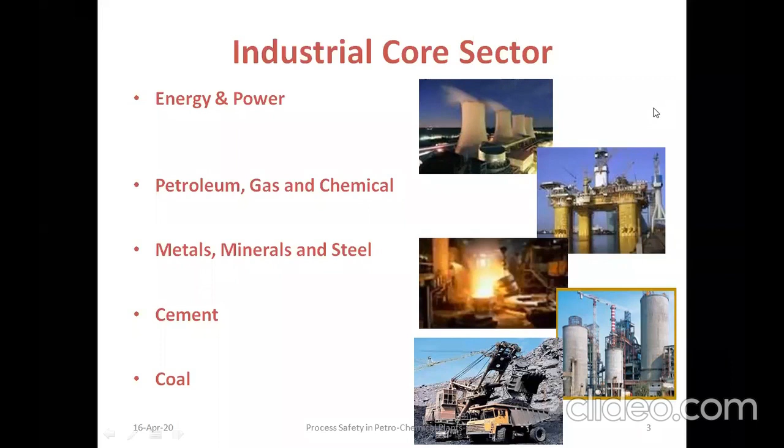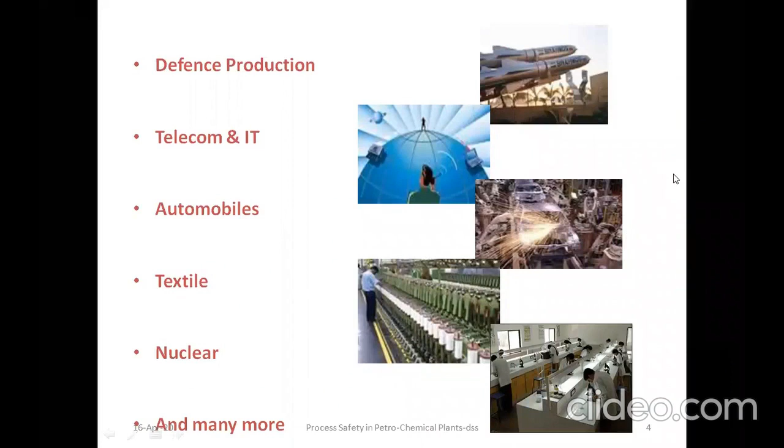Before going to process safety, we'll understand what sectors are available in the industry. We call it the core sector: energy and power, then petroleum, gas and chemical, then metal, minerals and steel, then cement and coal. Then we'll go for defense production, telecom and IT, automobiles, textile, nuclear and other industries.

Now, when we go for the industrial domain, we have storage of raw material, solid or liquid or gas, process plant or machinery, utilities, or power, steam - who are all generating power and steam - and isolated nitrogen. This is now coming up separately in industries. Previously, all these utilities were generated by the same plant and utilized there. Now the worldwide strategy is generating separately and supplying to others.

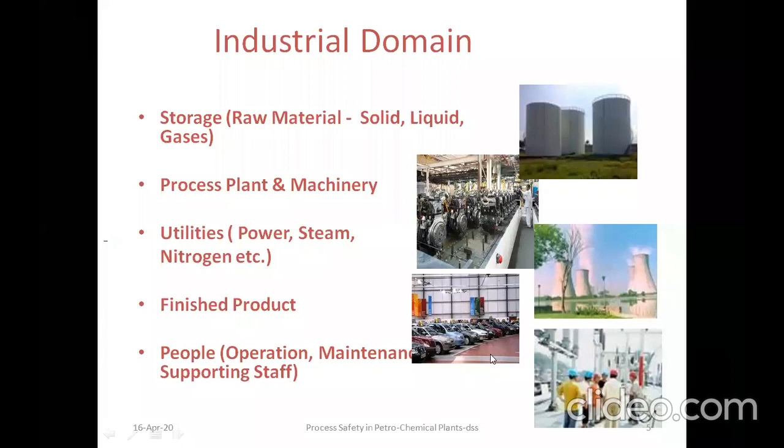They are called downstream industry. This is the technology they are doing now. Then finished products, then people involved in operation, maintenance, all these things - we call them supporting staff.

Now we call it industrial accident. When you go for an accident, it is a very tough, unwanted thing that everybody wants to avoid. But it is one which causes a major failure or accident that gives a loss to the industry as well as to human life.

So we call it industrial accident - caused by chemical, mechanical, civil, electrical and other process failures due to negligence. Normally negligence is the major cause, and it comes under industrial plant spillover to areas outside the plant, causing an environmental problem. That is what we call industrial accidents.

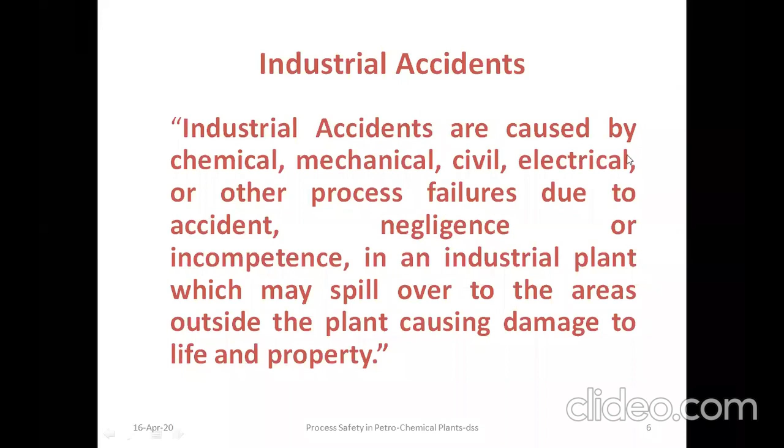Normally we have some idea. We say industrial accidents mainly originate from manufacturing, formulation and installation. This starts from manufacturing, then the installation process, then including commissioning and maintenance process, and disposal. Then it can also happen during material handling, and during storage.

That is the facilities they have - some manufacturing as well as storage, like oil tankers, all these things. Then isolated storage, then warehouses, then godowns. Then while transporting the materials, this can happen.

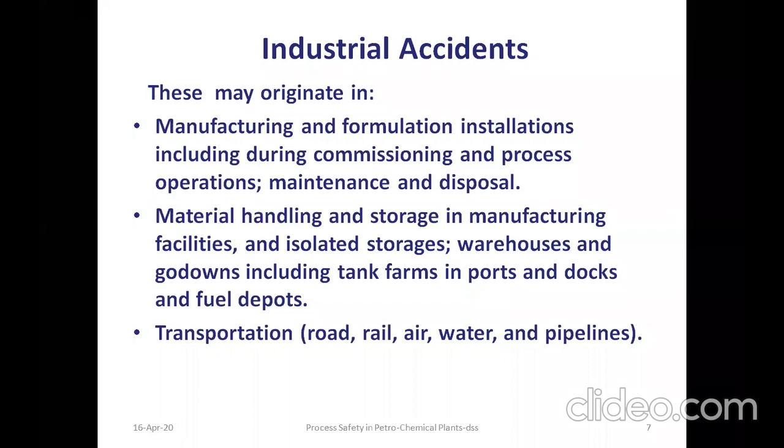This is the accident. Now, what are the major threats for the petrochemical industry? They face accidents - fire, explosion, toxic release, poisoning, and combination of all the above. These are the things we call major threats in our petrochemical industry, which should be avoided. For that, we are going to discuss this.

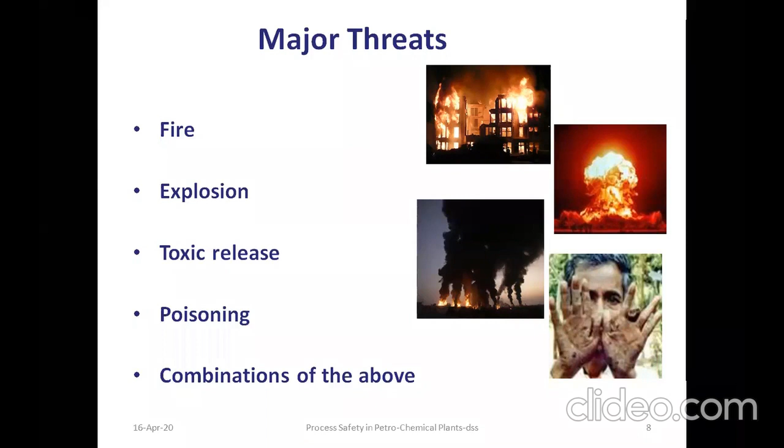Now, what are the probable causes for these accidents? Normally, when you go in detail, what are the problems? The major one is process variables - that's a famous term, particularly in petrochemical industry. That is normally pressure, temperature, level, flow.

When you talk about these process variables, whatever sensors are used are all electronic nowadays - there's no electromechanical, it's purely processor-based. So we can talk about deviation - we call it process deviation because of these PVs, that is process variables.

Then parameters with regard to state of substance - liquid, gas, proximity of substances. Then runaway reactions because of catalyst or chemical reactions. Then hardware failures because of electronic failures resulting in large scale spills of toxic substances.

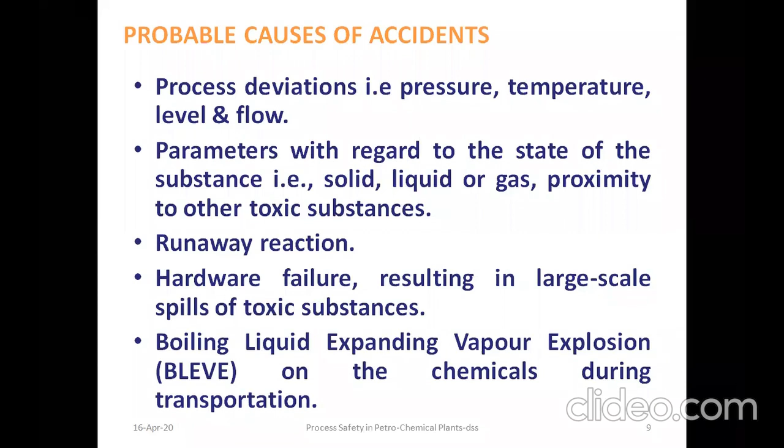Then cutting and welding - during welding or cutting maintenance work, there is also a problem. Then open flame is also a problem. Then carelessness is also there. Then poor housekeeping - yesterday also we had a meeting on fires. That is very, very important.

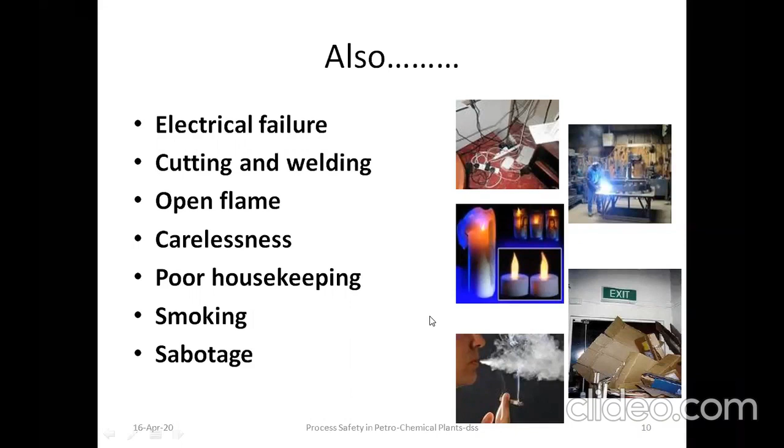Today also we are passing through a critical situation for corona. We have to understand that housekeeping is very, very important. Then smoking, then sabotage - these are also included in the problem. Then compounding effects - what are the effects of the accident normally? Please remember, these are things we are discussing more on the petrochemical industry, but this can apply to normal industry too.

That's the meteorology conditions of the area - wind speed and direction, rate of precipitation, toxicity quantity, the quantity of chemical released, and the population it reaches. Then the probability of formation of lethal mixtures, and industrial activities - nearby industries will also be affected. One accident in an industry can affect other nearby industries, which is the compounding effect of accidents.

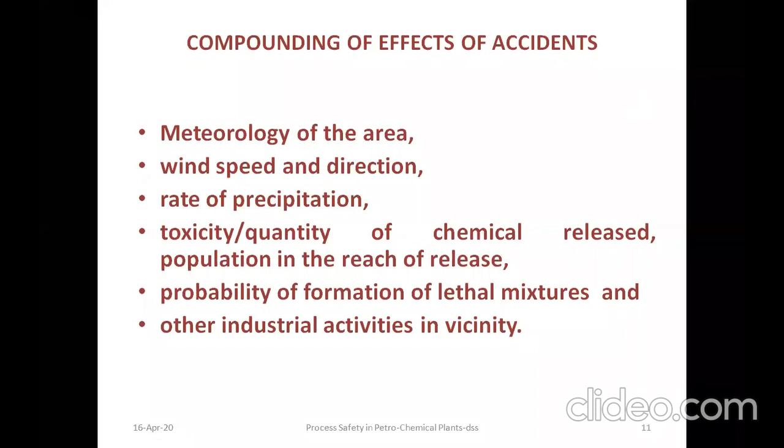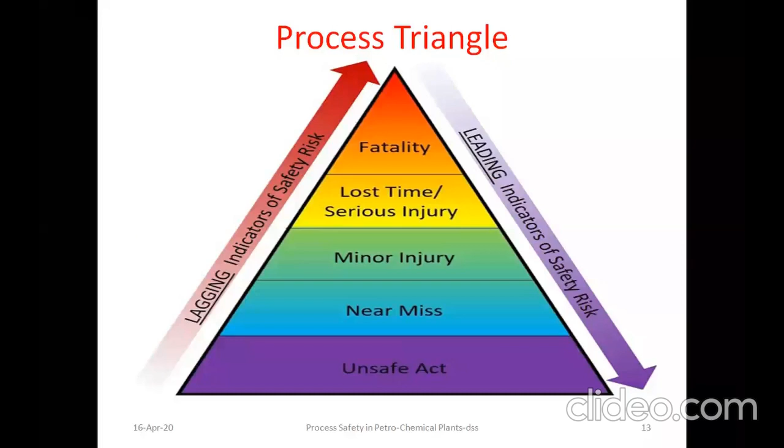Then what are the impacts? Normally it starts with an unsafe act, then goes to a near miss, then minor injury, then lost time, then serious injury, then fatality - which is what we don't want, because it leads to heavy damage. These are the things we call the process triangle. Everybody wants to avoid these things. This is the impact, and this block diagram will explain it.

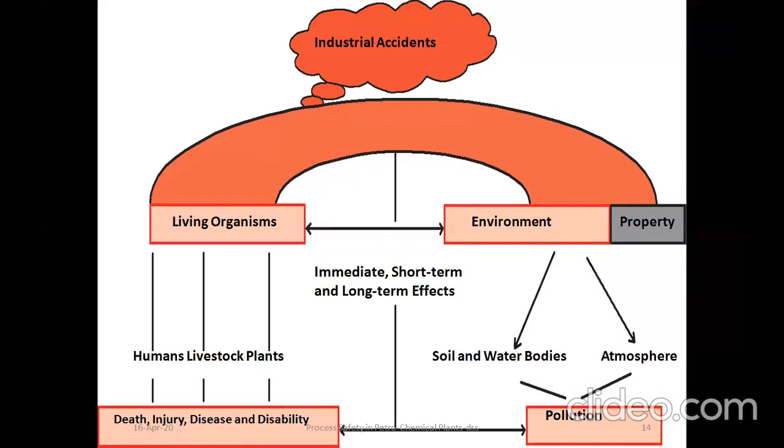We have got three things. Living organisms will be affected because of this - humans, livestock, plants are there, and that is also a problem, leading to death or injury. Environment is also a problem, then property loss - these are the things. When it comes to environment, it will spoil the soil, air, water, all these things, and the atmosphere, that is air.

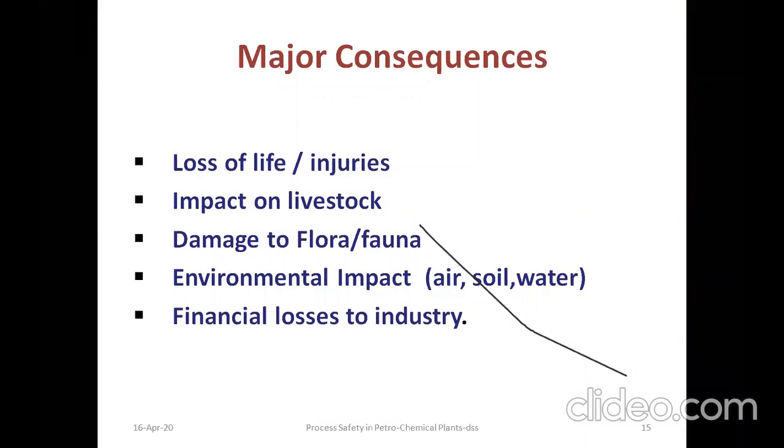So then it goes to the major things. Loss of life is very, very dangerous - that should not happen. Then impact on livestock, damage to flora, then environmental impact - that is something we don't want. Financial losses to the industry as well as to individuals. These are the major consequences of accidents.

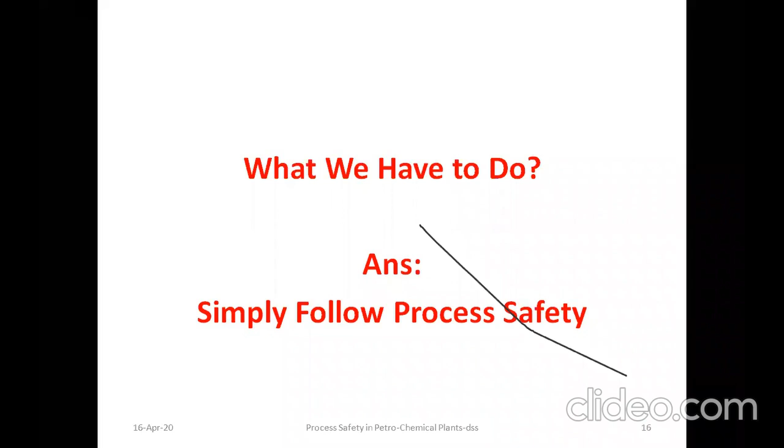Then what do we have to do for this? The answer is very simple - you have to follow process safety. In petrochemical industry, heavy industries throughout the world nowadays simply follow process safety. That is the reason we are not facing major accidents nowadays. For all industries coming up, for youngsters going to work in industry, they should follow process safety. So that's the answer - what to do means we have to follow process safety. What is to be there? Then we should understand what is the process.

Normally everybody asks, sir you are telling about process safety, process safety, then what is the process? We will understand what is the process. Process is one very simple thing - you have to make it a procedure. Whatever job you are doing, you are aiming to achieve something, and for achieving that, you make some route, some steps, or procedure you follow. That is the process, simply.

Process is a simple set of steps or decisions involved in the way something is completed. It's a set of recurrent and periodic activities - you do the activity in sequence so that you produce a result, which is the aim of the work. So we get the result by following simple activities in a sequence of steps, a sequence of interdependent links, using one or more resources. So we simply call it a process, a series of actions.

For example, take coming into this webinar class - what process have you done? You open the laptop, switch it on, then log in. All these steps you have done - this is a process to achieve that, to present yourself in the meeting. This is like a process. This is a simple way of understanding process, right?

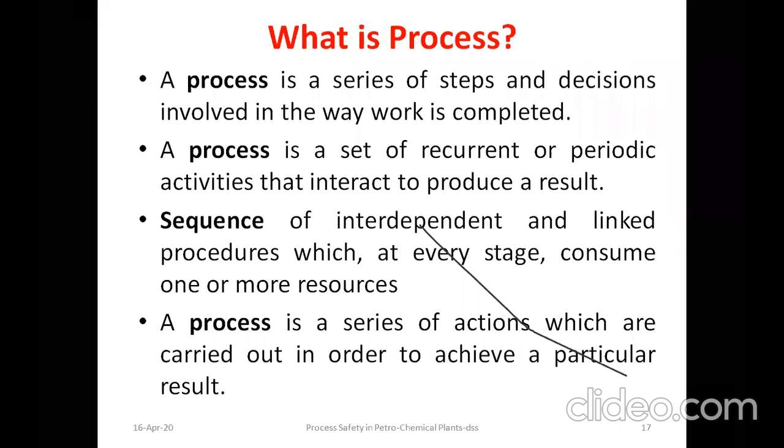Then what is safety? It's very simple - you have to protect yourself, or we can call it protected from harm or other non-desirable outcomes, because something will outcome that we don't actually want, and safeguarding from that is safety. It can also refer to the control of recognized hazards in order to achieve an acceptable level of risk. We can have risk, but it should be at an acceptable level - we cannot go beyond this.

That is called a safety. The concept includes all measures and practices you have to follow, to preserve the life, health, and bodily integrity of the individual. This is safety.

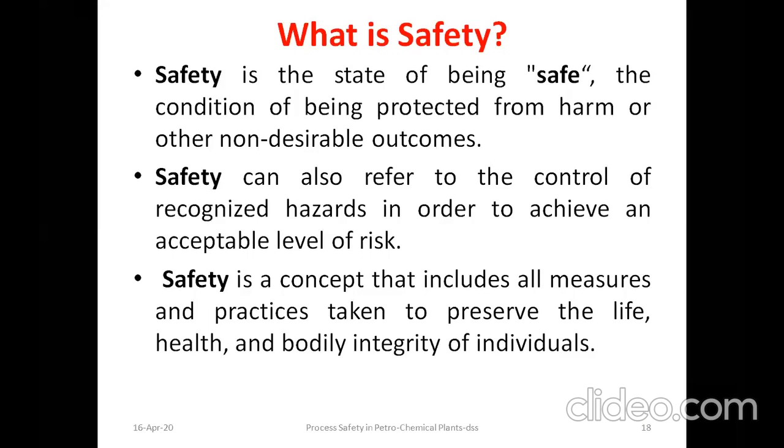So we have seen the process, and we have seen safety. Now we'll see what process safety is, combining both. We have the process in petrochemical, and we have individual safety. Now let's see what process safety is.

Generally, we call it prevention of unintentional release. When we go for a plant, we will not do it intentionally, nobody will do that. But mistakes happen because of some parameter change or procedure change. That is called unintentional release of chemicals, energy, or other things, which is called process safety.

We have to make it safety. For this, we have to set a discipline and framework for managing the integrity of the operating system or process. We have to make it a procedure, which we call the process safety procedure, present in many industries.

No doubt, all industries are following this. That is the way we train people. Normally in heavy industry, they give very disciplined training for process safety to whoever is involved in the process, including maintenance, operation, as well as warehouse people. Normally this is what they do, combining process and safety, which we call process safety.

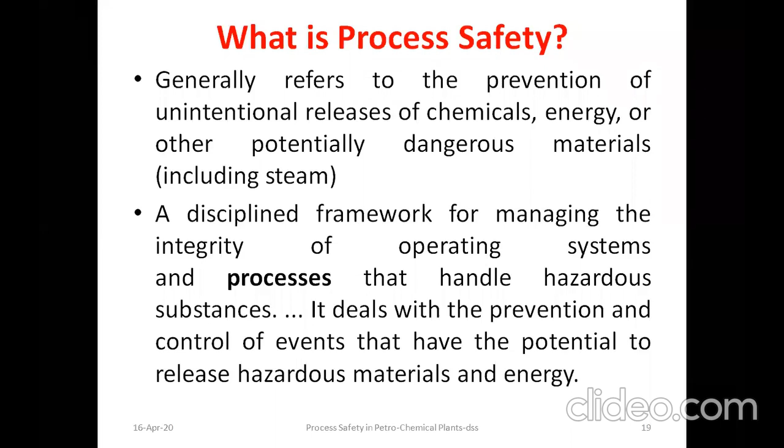Continuing, it is a discipline - you should be disciplined. When following a step, it should be done with good discipline. You have to follow good design principles as well as operating practices, which is in the manual. But when you do it every day, it becomes automatic practice - there is no need to refer to a manual during an emergency. That is what we train people for, so they go through the process safety properly.

Then it deals with the prevention and control of incidents, and potential release of hazardous material or energy, because once you lose control of process safety, that results in loss of energy too. Apart from environmental problems, energy loss is also there. Such an incident can also cause toxic effects, fire, or explosion, which would ultimately result in serious injury, property loss, production loss, environmental damage, as well as legal issues. These are the things process safety has to consider.

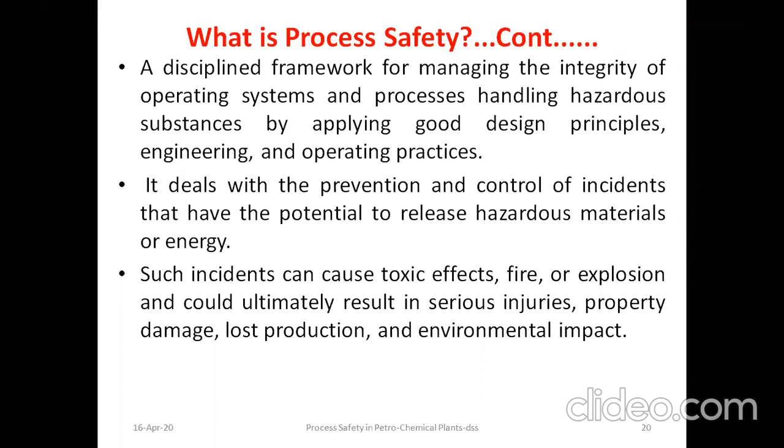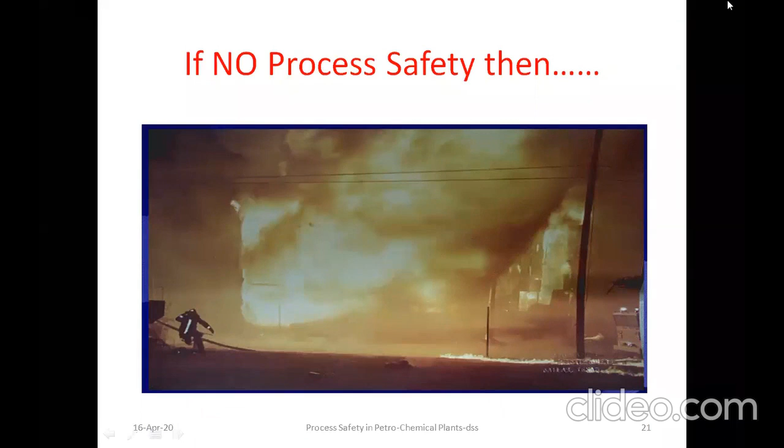These are very important things, right? If you don't follow process safety, very simply, what will happen? This is one sample. We will see that if you are not able to do process safety properly, not able to control or follow this, these things will happen, right? This is one result.

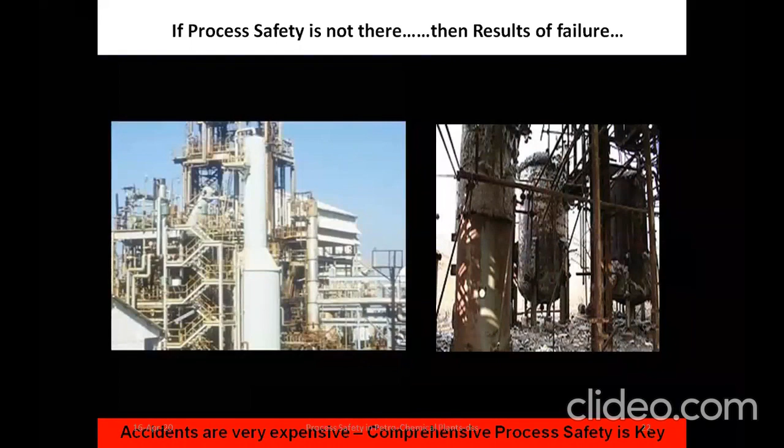This is from our petrochemical industry. Please remember, serious accidents have happened in the past. In recent days you cannot even count them, but this is one of the older ones. We'll have an idea of what happens in petrochemicals if you are not able to follow process safety, because the loss will be very heavy - not like a simple accident, right? This is one sample of these things.

Then we move to plant safety. Now we are coming to the plant. Primarily, what is its function? It's a primary management activity. Normally everybody says the safety person working has to be involved and has to follow it, but the real thing is it's a primary function of management to make sure everything is done - to reduce, control, and eliminate hazards.

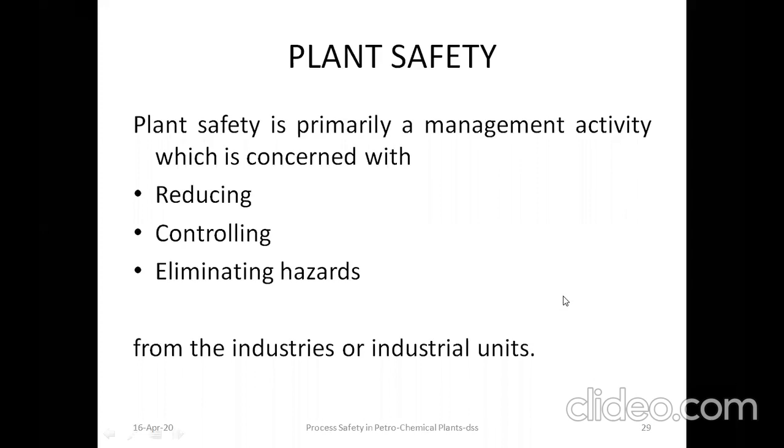These are the three things all industries have to follow. This is a management responsibility, so they cannot say no. Normally, plant safety is under the control of management only. We have to follow this - they should set a role model, and only then will all the workers or engineers follow.

Then what is the significance? The significance is, while following plant safety, an industrial incident causes loss to both employer and employee, not only employee. This employer loss is very, very dangerous.

Then medical aid. Once an accident happens, how much money is involved in medical aid? Very, very dangerous. Then training a newer person - okay, you can have a new person, yes you can have it, but how much cost? You are training the people, how much time it takes.

That is called a lost time accident. Normally in industry, if a person involved in an accident is not able to report before 48 hours, that goes as a lost time accident, because it shows it is a very dangerous accident. If the person is not able to return to duty before 48 hours, then it counts as a lost time accident, because the management is answerable for that.

Then investigation - what is the cost of investigation? They will form an inquiry committee, and all these things cause loss of money. That is the one.

Then cost of supervision and inspection - you have to involve this, that is also a cost. Then cost of government - the factory has to call the people, you have to spend money on this. Then public health services, all this money is involved. They cannot do it unless we serve some money, then only they will do that, because that is government money involved.

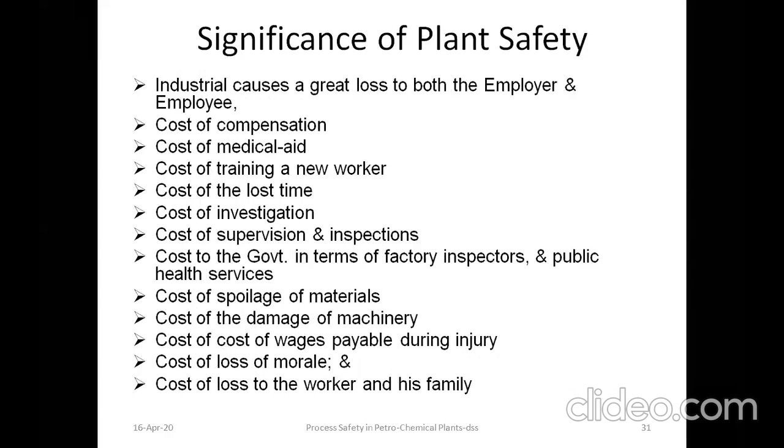Cost of materials, then damage to the machinery, as well as payable to the injured people. Then loss of morale, because morale is very, very important. Once an accident happens, the company employees' morale goes down, and getting it back is very, very difficult. Then there is cost loss to the worker as well as the family - that is very important. These are the things.

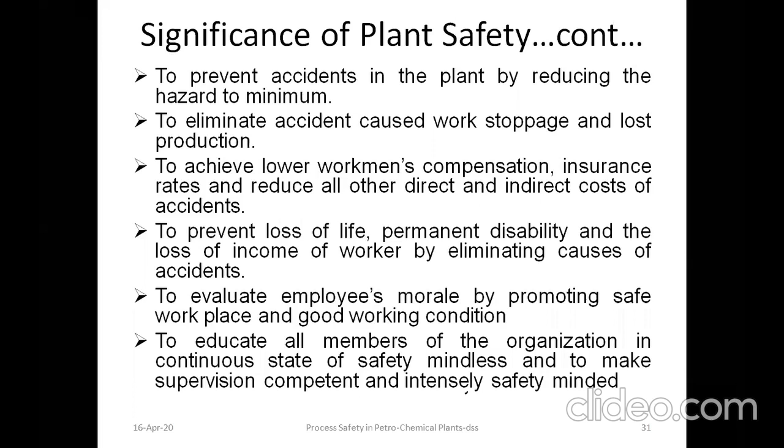Now, how to prevent this? We have to reduce accidents as well as hazards, and eliminate accidents, work stoppage, all these things. To achieve this, lower workman's compensation, insurance, all these things, to prevent loss of life, permanent injuries - all these things you have to do. To elevate employees' morale by promoting a safe workplace as well as good working conditions. Then we have to educate the employees, all employees from top to bottom.

Then what is the objective of process safety? To prevent accidents, reduce the plant hazard to minimum, to eliminate accidents so work stoppage or loss of production should not come. To achieve this, lower workman's compensation, you have to do this to prevent loss of life. All these things are there. Then morale is there. Then educating the members is there.

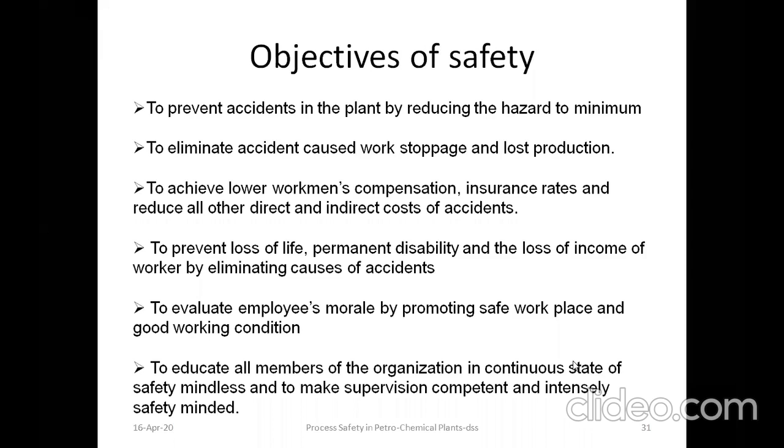Then what are the causes? Normally the major one is unsafe condition. In this, the job itself, the work schedules, the psychological condition, and the machinery and equipment condition. Then second is unsafe act, and third is miscellaneous causes.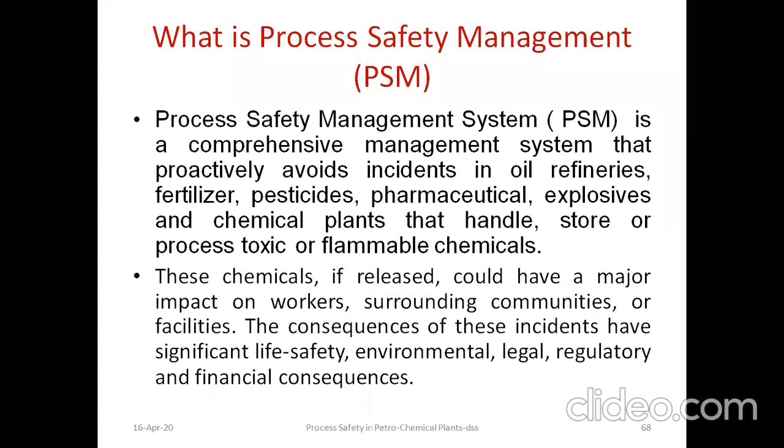For these things, we normally call it process safety management. Process safety can only be done if management is involved, so the system itself is called process safety management, PSM. It is a comprehensive management system that all industries follow normally because it impacts workers, surrounding communities, the consequences of incidents, life safety significance, environment, legal regulation, and financial consequences. That is the reason why PSM is very important.

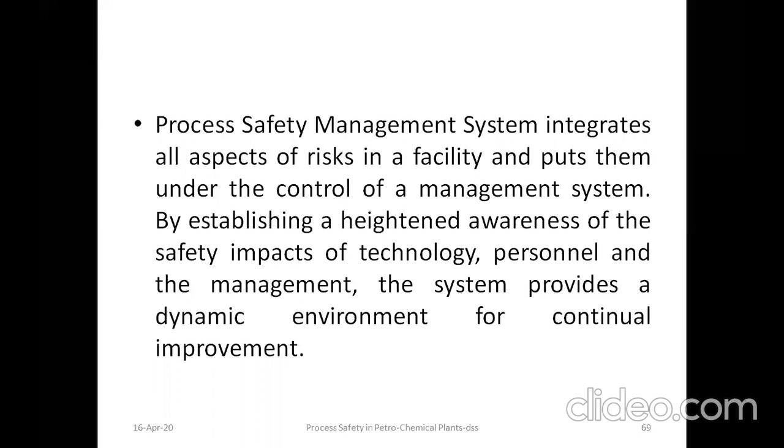The system is integrated with all aspects - all the risks, whatever facilities are available, whatever the inputs - everything will be taken into consideration. Then the management system will be followed, and awareness will be highlighted on all these things. Whatever technology has been developed has to be incorporated, then it will be trained to all the people so that it remains a dynamic environment. Continual improvement has to be done - that's there whenever you go for any system. Now it is compulsory that we do continual improvement, and we have to show that in PSM also it is there.

PSM consists of 14 elements. When you go for process safety, the management has to form a PSM committee that consists of 14 elements. What are the elements? First is participation of employees, very very important. Then process safety information has to be done. Then operating procedures should be very clear, documented, and loaded into the ESD system.

Nowadays the systems come with guidance also. When the operator makes a mistake, the system will display guidance - if the operator is doing something wrong, the system says whatever you're doing is wrong, this is supposed to be done, and that guidance will be followed by the operator. That is what we call a friendly operating mode. That is the reason why we can train people very easily so that mistakes can be avoided - they cannot do it wrongly.

Then there is process hazard analysis. Then contractor control. Then safety work practices has to be there. Then training will be there. Then pre-startup, which we call pre-commissioning - that will be there.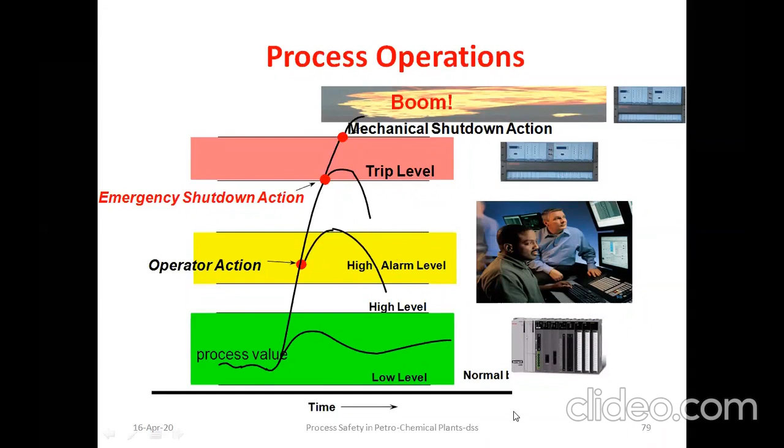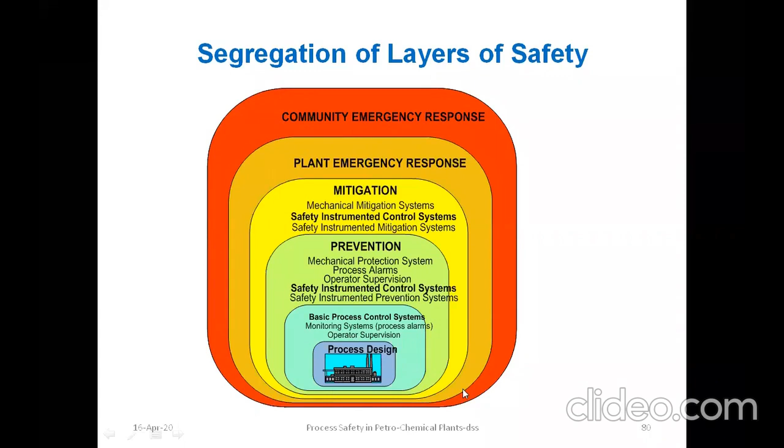Then you go for segregation of layers of safety. You can see this process design, then basic process control system has to be there, then it goes to prevention level, then mitigation level, then plant emergency, then community response. These are the layers to understand how process safety has been integrated. They will proceed and design in that angle only. Yes, this is one of the safety layers.

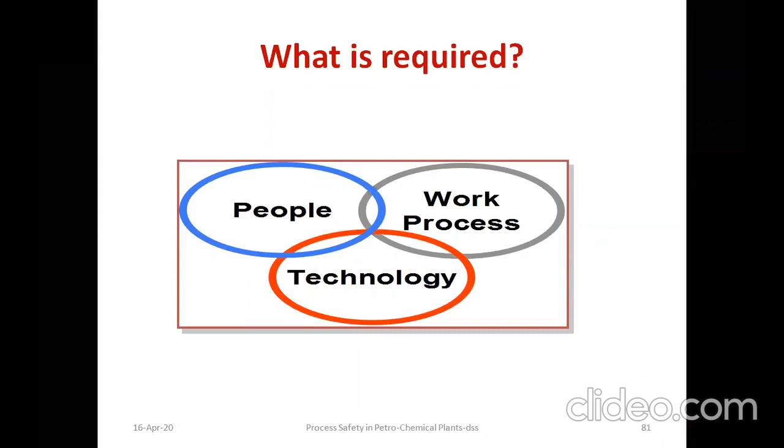Then what is required to achieve all these things? We require people, work process, then technology. All is available, so it is possible now. Now we should have occupational safety - now they will get confused. Previously we said about process control as well as safety control. Here also same thing - when you go for occupational safety, process safety is different because it is workplace rules.

When you go for occupational safety, process is a collective commitment. Remember, when you go for health and safety, it's worker training - address the event over which the individual worker has control. Whenever something happens, that individual has to record it; if they don't have control, then it's a problem, then it's a supervision issue. Here it is a focus of system - then it's individual behavior, safety equipment, focus on individual well-being. That comes under health and safety.

But in process safety, it is a focus on system, with a broader impact that could affect a group of workers, more than just workers - even the general public will be affected. This is process safety.

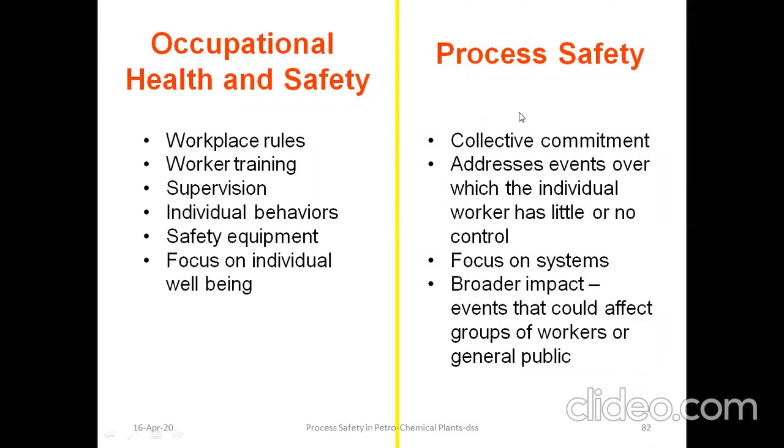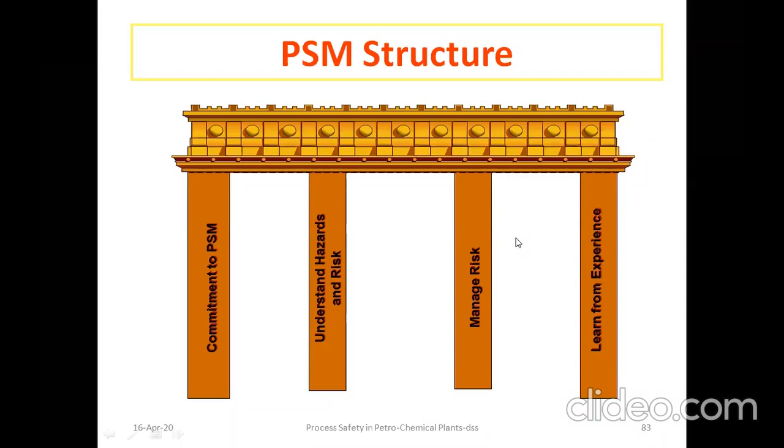This is a structure - you can see commitment, PSM, then understand the hazards and risk, then manage the risk, then learn from the experience. If anything happens, we should ensure that should not happen again. That is the way it has to be taken. Commit to process safety, understand hazard, learn from experience, manage the risk - this is a risk-based PSM framework.

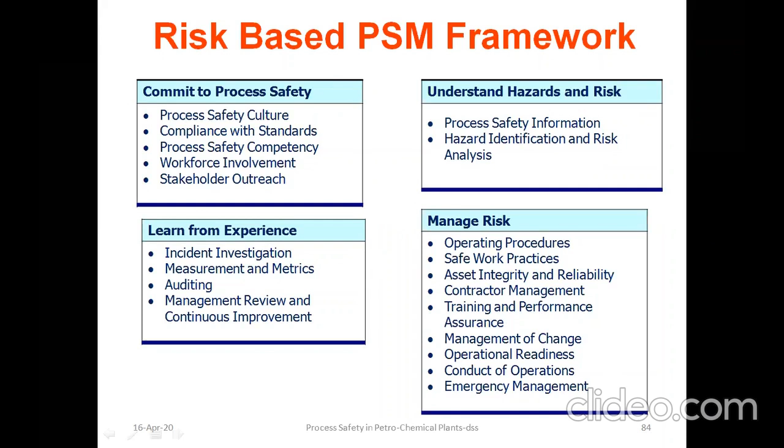Executive support is very, very important, because finance is involved everywhere - additional finance is there. Production penalty may mean production needs to be suspended when warranted, because these are the things that hold the organization accountable. When it becomes a problem, then it is an issue.

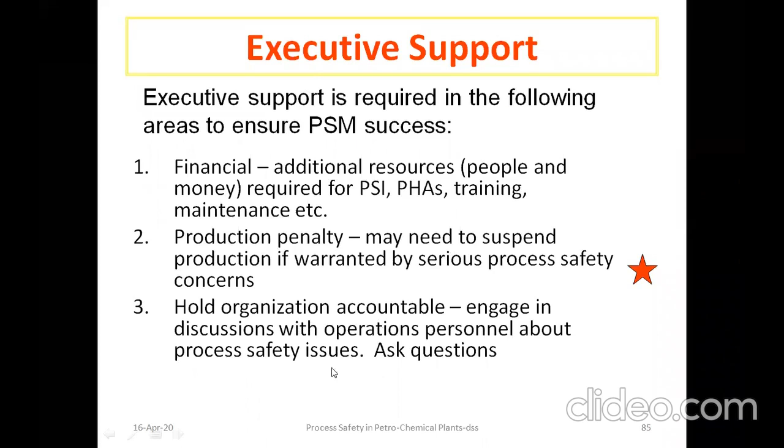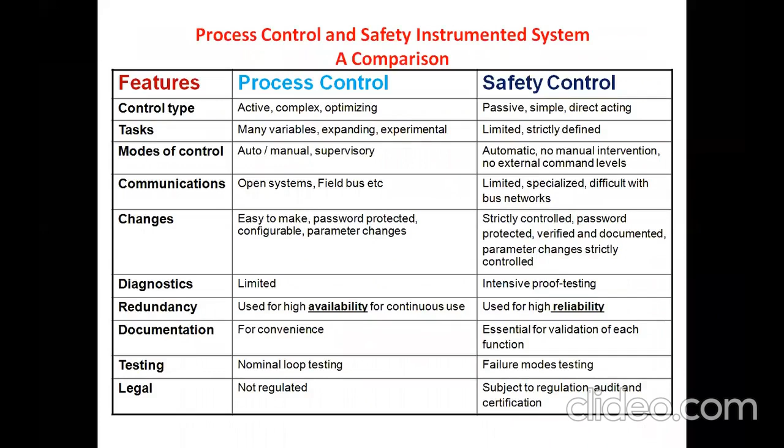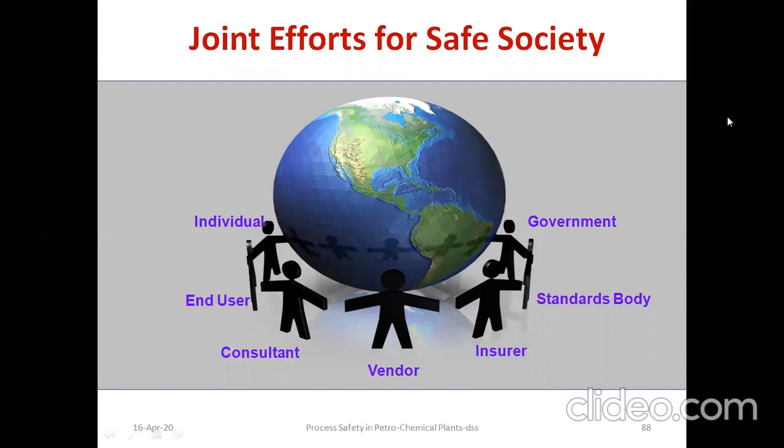Then here, already we have seen this - by means of joint efforts, the process safety accident can be avoided. That is individual, end user, consultant, vendor, insurer, then standard - whatever standards we have, the standard and regulation has to be followed. Then government - so that with joint efforts, we can achieve process safety.

My conclusion is, generally what many industries are doing is not taking safety very seriously. We should take it as a serious effect, so improving safety is a multi-step process that first involves replacing discrete sensors. Normally analog sensors have to be replaced with digital, called smart devices, so that maximum information will be obtained from the devices - so that we get all the information, all the data from the plant.

Then overcoming the limitation of analog output sensors by selecting sensors with digital communication will increase the overall performance, because with digital, the speed of information will be more so we can get information very fast. This will help in process safety, because even milliseconds, nanoseconds are very important. Integrating digitally communicating transmitters with a digital input safety system is very useful - lower cost, improved shutdown speed, reduced false alarms. All these things will be better. The real value of digital communication - this is my conclusion.

So make everything digital, so that process safety will be on a basis of 0, 1 - that is called digital control. That will be very useful.